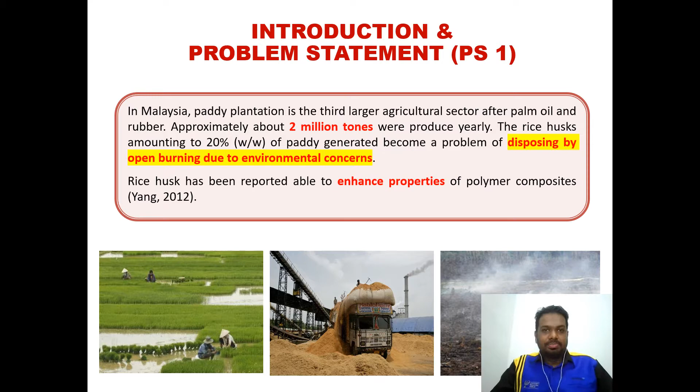The second problem statement: according to the International Rubber Study Group, IRSG 2015, the production of synthetic rubber worldwide is about 13.5 million metric tons and 13.2 million metric tons respectively. So yearly we are producing a lot of

nitrile rubber gloves in Malaysia, about 20,000 million pairs annually, based on 2018 statistics. Because of COVID, I'm sure the production of rubber gloves is becoming really in demand.

People are just throwing it away, and it is really becoming a headache for us. Malaysia is currently the world's largest exporter and producer of nitrile and natural rubber gloves. So that's our second problem statement: the abundance of disposed rubber gloves and other types of raw materials.

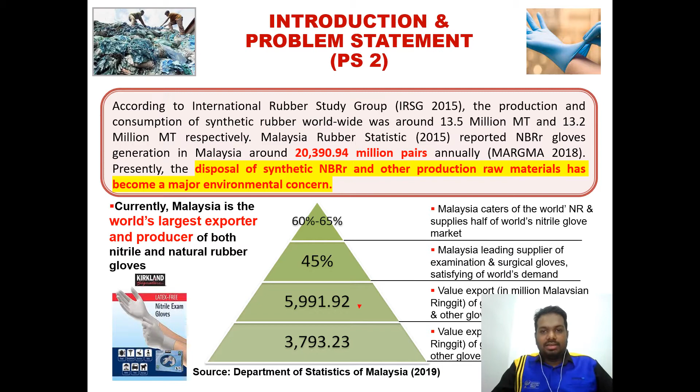It can cause a risk of cancer, microscopic damage to our living tissue, and a lot of other health issues. So that's our third problem statement.

Over some days we came up with a product called ZShield material, which is actually a protective cover material. We are preparing PPE using existing materials which are expensive and not recyclable, so we came up with a new material from this agricultural waste.

As we've seen earlier in the problem statement, we have an abundance of agricultural waste that we just burn in open burning, which becomes an environmental concern. So we produce a material called ZShield, which is actually a protective cover material fabricated from the waste polymeric waste that we have seen earlier.

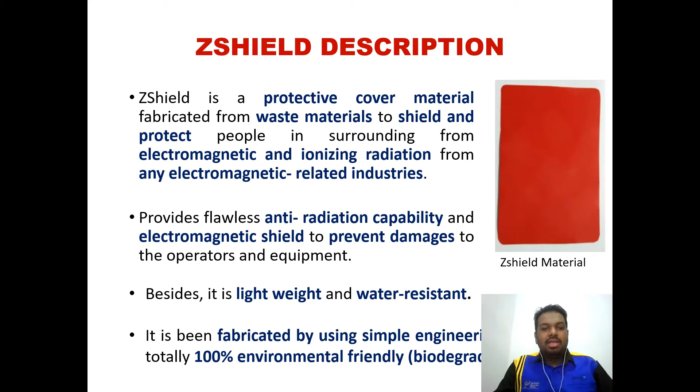It also provides anti-radiation capability and electromagnetic shielding that can prevent damage to the operator and various health issues. It is lightweight, water resistant, and fabricated using a very simple engineering process. The main thing is it is 100% environmentally friendly, meaning it can biodegrade, so you don't need to dispose of it—after some time it will degrade itself.

Okay, so we know about the electromagnetic wave spectrum, and we are mainly dealing with the one in the red box, which is a very high electromagnetic reading.

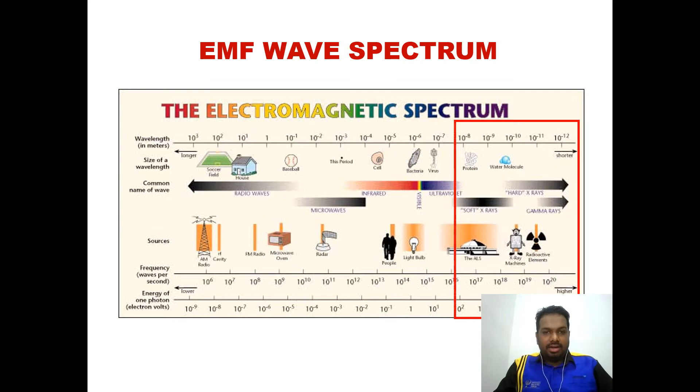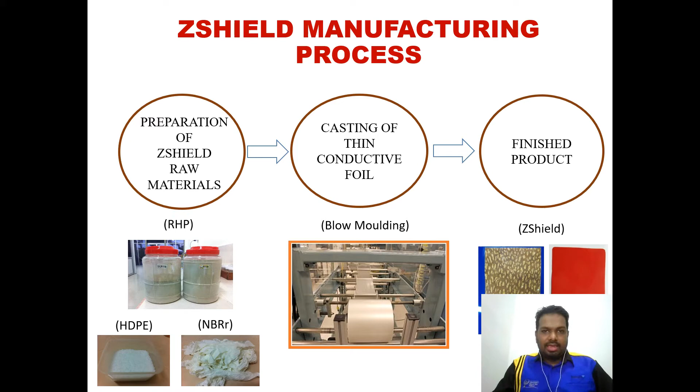So the ZShield manufacturing process is pre-processed using high density polyethylene and nitrile butadiene rubber. We process it and cast it into a thin conductive foil to produce the finished product, which is the ZShield. These are the elements available inside.

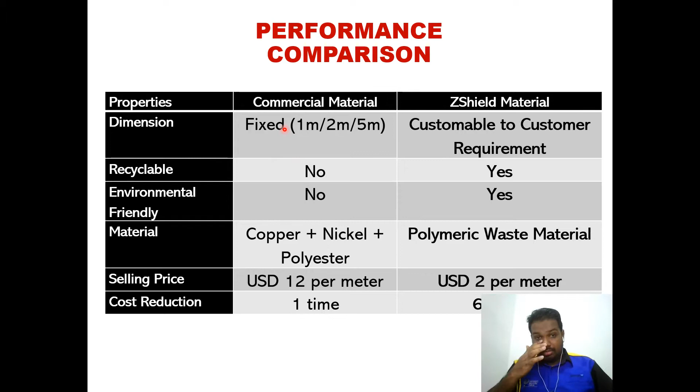So if compared to the performance with commercial materials, the dimension of the commercial material is fixed - you can only purchase in a certain dimension, because it is machine produced, based on the raw materials inserted. This is non-recyclable, so it is not environmentally friendly.

And the material is normally prepared with a mixture of copper, nickel, and polyester. The selling price is approximately USD 12 per meter, and the cost reduction is one time.

So if compared to the ZShield material, we can produce it according to the customer's requirement. It is recyclable, environmentally friendly, and the main thing is it is prepared from agricultural waste, which we call polymeric waste material, and the price is only USD 2 per meter. So compared to the existing material, we have a 6 times cost reduction.

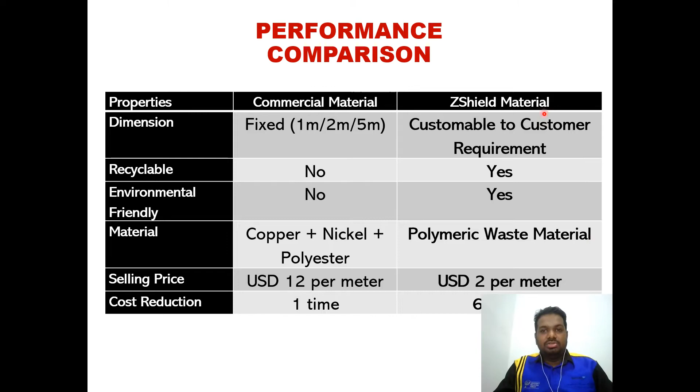So there are a lot of advantages using this ZShield material. You can see some of the lab scale tests conducted at our industrial partner Peneraju Hijau Lab in Penang, where we compared with various materials.

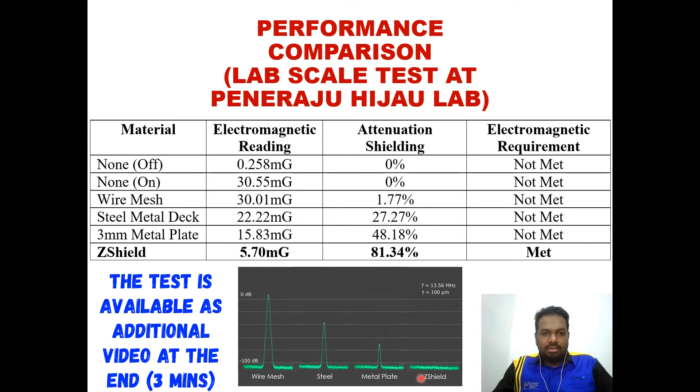So we can see the electromagnetic reading generated and the attenuation shielding. Z-shield can produce 81.34% of electromagnetic shielding, compared to all the other types of materials available. So the electromagnetic requirement is met for Z-shield, and as we can see in this image, Z-shield can really provide good shielding for ourselves.

Okay, so commercial potential - this is highly marketable because of the cost, with a cost reduction of about 6 times. Another thing is it's eco-friendly, it's recyclable, and it has a shelf lifespan of about 15 years, meaning you can use it up to 15 years. This is produced based on the collaboration with the investor.

So these are the potential applications - you can use it in any facilities that have electromagnetic exposure.

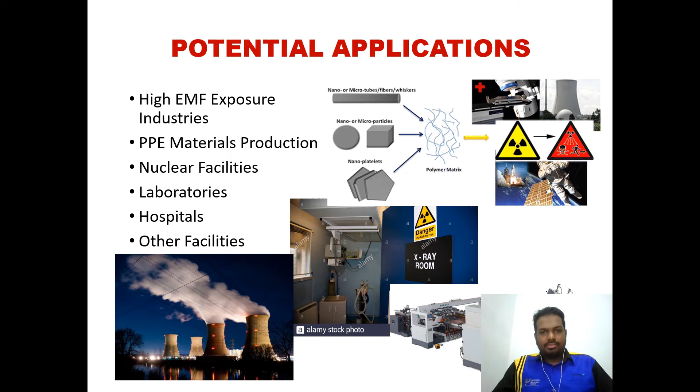Okay, so I think I have talked about this novelty - this is the first EMF blocking material from waste material, and it has a lot of advantages, and it can be a solution for reducing EMF in the industry.

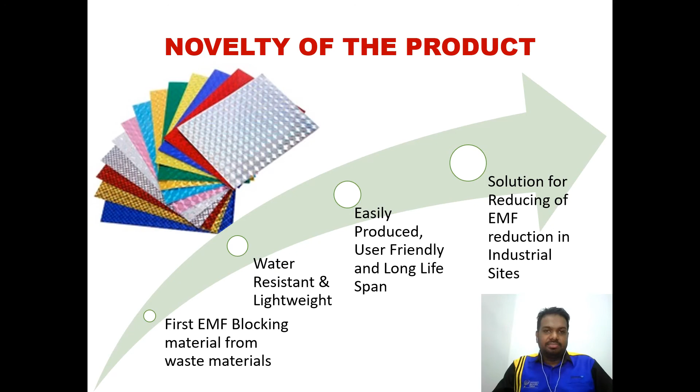So for international recognition - we have a lot of materials because this research has been carried out for about 5 to 6 years already, started from 2015. So we have developed various stages of material.

In 2017 we won a gold medal in the Malaysian Technological Expo, and we represented Malaysia and won in South Korea the same year, in Seoul, at the International Invention Fair. We also received the UNIMAP Research Excellency Award in 2018.

So we have various publications, started from 2015 until 2021, related to all these materials.